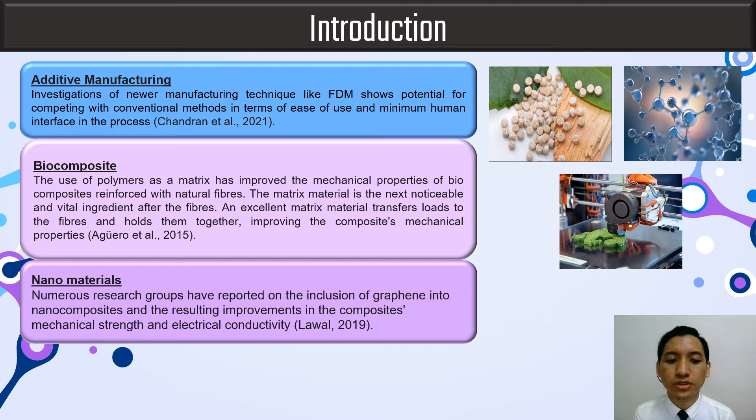Lastly, Lawal found that numerous research groups have reported on the inclusion of graphene into nanocomposites and the resulting improvements in the composite's mechanical strength and electrical conductivity.

For the problem statement, Farah et al. 2016 reported that PLA is eco-friendly, biocompatible, has good thermal processability, and is low cost. However, it has brittle behavior and degradation over a period of time, says Cao 2020. Thus, to overcome this limitation, this research aims to increase the potential of PLA. It has been discovered from previous studies.

Hybridization involves a combination of fillers and natural fibers that results in increased mechanical properties of the composite, said Khan 2005. Young's modulus and impermeability of the PLA matrix were enhanced by its blending with graphene oxide and graphene nanosheets, said Pinto et al. 2013.

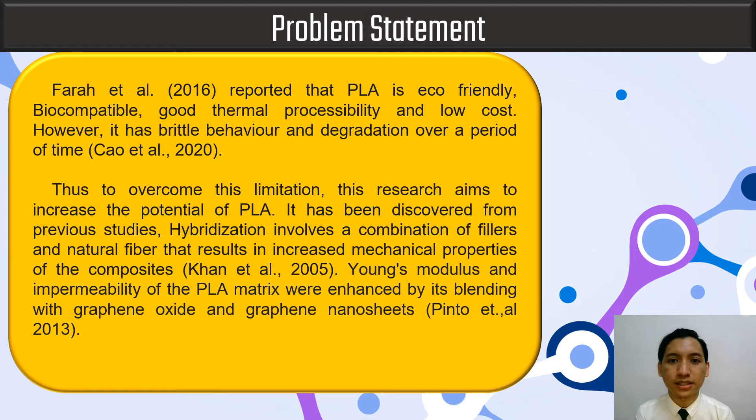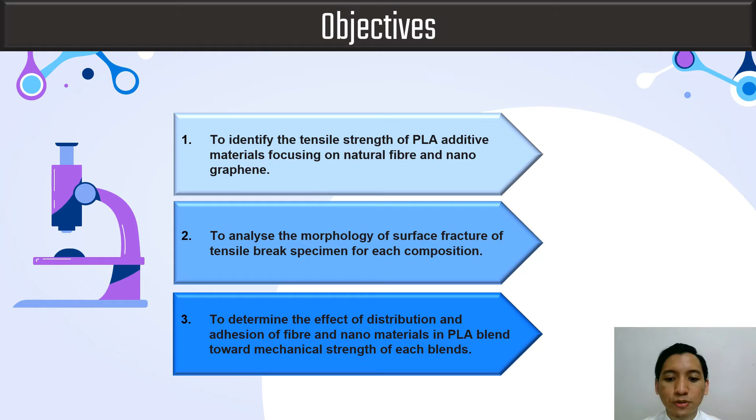This research consists of three objectives: first, to identify the tensile strength of PLA additive materials, focusing on natural fiber and nanographene. Second, to analyze the morphology of the fracture surface of the tensile break specimen for each composition. Third, to determine the effect of distribution and adhesion of fiber and nanomaterials in the PLA blend towards the mechanical strength of each blend.

This part shows the scope of the project, where we want to carry out the blending process of polylactic acid separately with fiber cockpit and graphene nanomaterials at specified compositions, analyze the mechanical property of each blend composition through tensile strength using the Shimadzu AGS-X, observe the fracture surface morphology of the tensile break specimen for each composition, and lastly, analyze the interaction and the effect of distribution between nanomaterial with PLA and biocomposite through SEM analysis.

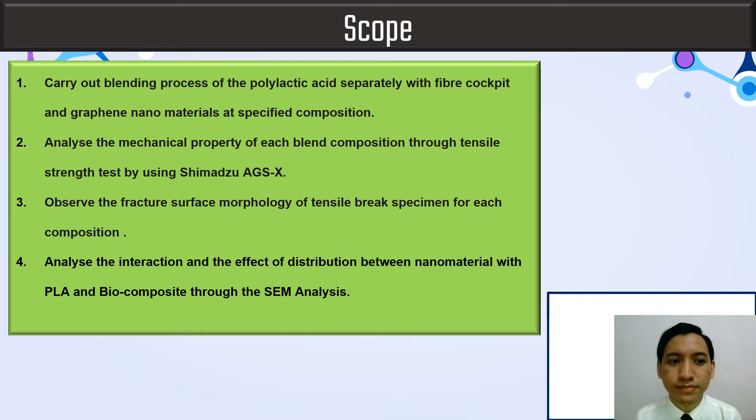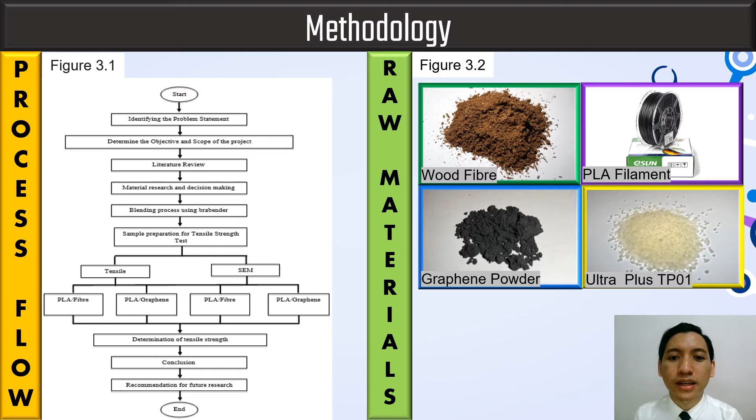Next is 3.1, which is sample preparation for tensile strength and morphology analysis. Table 3.1.1 shows the formulation of PLA fiber, consisting of 5 formulations A, B, C, D, and E and the amount of fiber content. Table 3.1.2 shows the formulation of PLA graphene, consisting of 3 formulations A, B, and C and the amount of graphene and compatibilizer agent TP01 content.

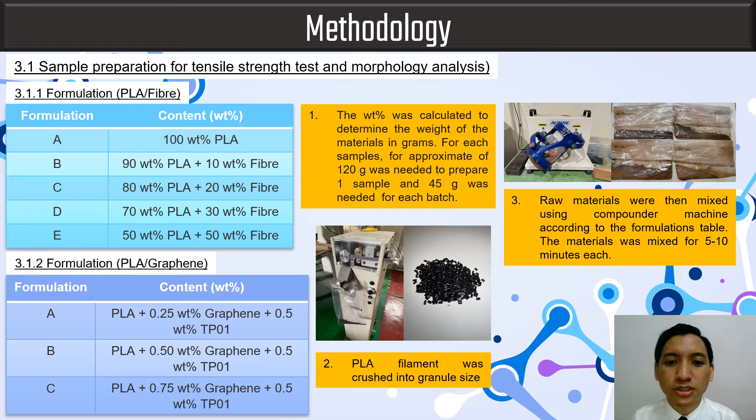The process started with calculating the weight percent of each material and determining the amount needed for each sample. Next, the PLA filament was crushed into granule size. Third, the raw materials were mixed by the compounder machine. The fourth step is the blending process using the Brabender machine according to the parameters table below.

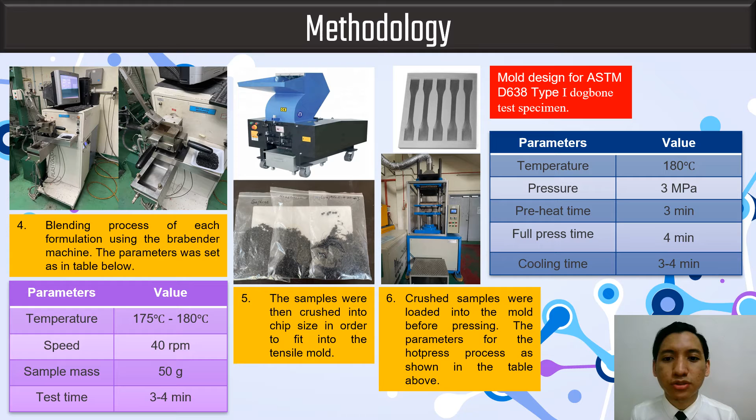Then the blend samples were crushed to be fed into the tensile mold. Then the samples go through the hot press machine according to the parameters table shown above. Next, the tensile testing was conducted using the Shimadzu AGS-X machine.

For 3.2, which is sample preparation for SEM analysis, the fracture part of the tensile samples was then coated using a sputter coat device. Lastly, the fracture surface images were captured using the Zeiss Evo VP SEM at magnifications of 200, 500 and 2000.

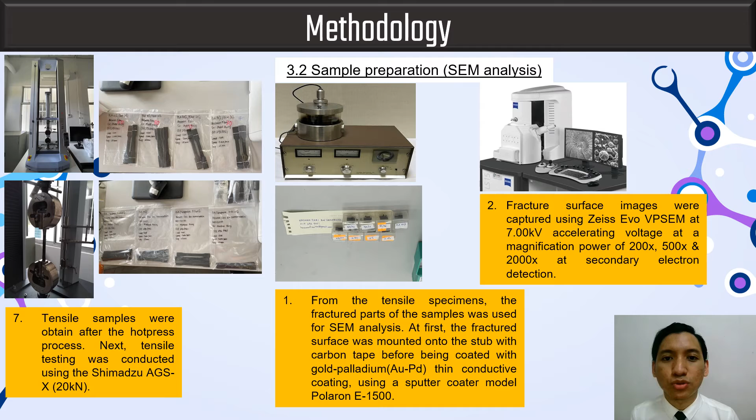So for the results and discussion, table 1 shows the max force and max stress of the PLA fiber blend from the tensile strength test. Addition of fiber up to 50% into the PLA blend reduced the mechanical strength of the blend, except for 20% of fiber.

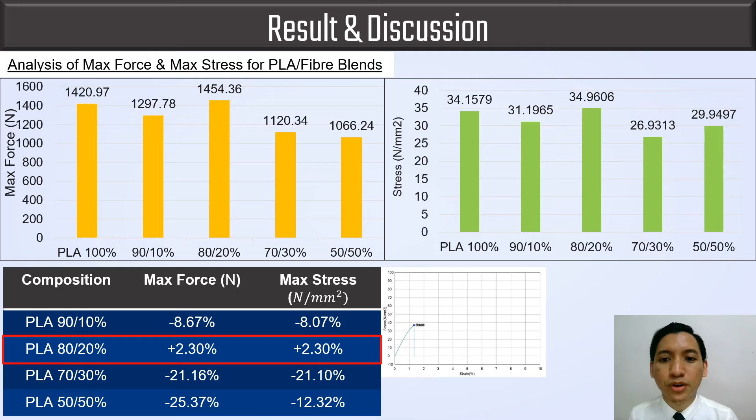For the 80-20% PLA blend, it revealed a small increase of about 2.30% in tensile strength. However, a further increase to 30% and 50% of fiber in the blend shows a large significant decrease in tensile strength, about 21.16% and 25.37% respectively.

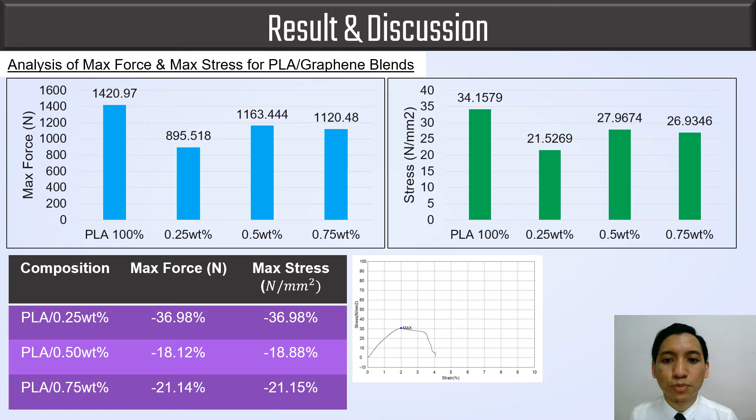In the case of the PLA graphene blend, Table 2 shows a significant reduction of tensile strength of the blend nanocomposite. The addition of 0.25% graphene in the blend results in a decrease in tensile strength of up to 36.98%. However, a further increase of graphene to 0.5% reduces the tensile strength by 18.12%, which is half of the value for 0.25% graphene in the PLA blend. But a further increase to 0.75% graphene in the blend reveals a small decrease in strength of about 3% compared to the 0.5% graphene blend.

Okay, this part shows the SEM photos of the fracture surface of PLA blends with various compositions of natural fiber. From the photos, it reveals that the fibers are not in loose form but in bundle form, embedded in the PLA matrix. The photo also shows bundles of fiber protruding from the matrix in the 90-10% and 70-30% blends, and we can see the track of fiber bundles as shown in the 80-20% blend.

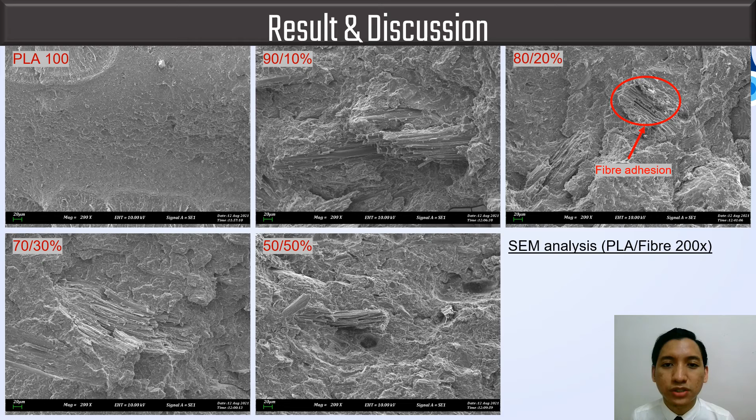The SEM photos also reveal the difference in size of the fiber bundles. We can clearly see the 70-30% blend has the largest fiber bundles compared to the other compositions. The 80-20% and 50-50% blends have nearly the same bundle size. The 50-50% blend shows the fibers were not well distributed in the PLA matrix, which forms a void at the surface when stress is applied.

Next, the SEM photos of the PLA blend with various amounts of graphene with the addition of Ultra Plus TP01, which acts as a compatibilizer. The compatibilizer has a fixed amount of 0.5 weight% for each composition, as shown in the formula table earlier. We can see the 0.25 weight% graphene blend shows the dispersion of graphene coated with the compatibilizer throughout the smooth surface of the PLA matrix.

However, in the case of the 0.5 and 0.75% graphene blends, the distribution of graphene forms irregular shaped granules throughout the matrix. On top of that, the PLA blend surface becomes rough due to the filling effect of this granule-shaped graphene in the blends. The void and granule-shaped graphene indicate that there is no interaction between PLA and graphene for the 0.5 and 0.75% blends.

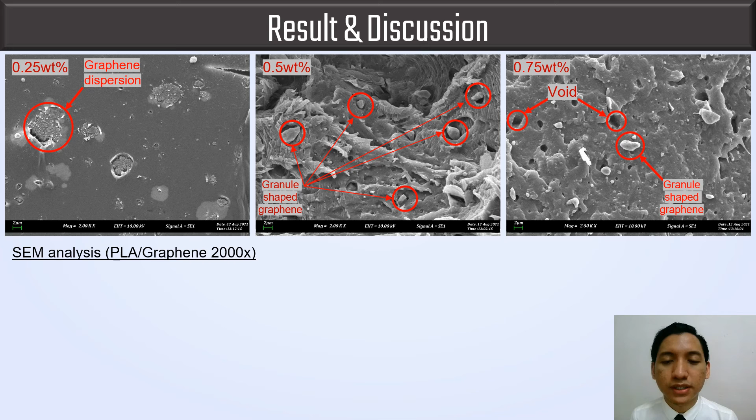Lastly, in conclusion, objective 1, which is to analyze the tensile strength of PLA with additive materials such as natural fiber and nanographene, was successfully carried out. From the result data of the two compositions, the PLA fiber composition was shown to have the most promising tensile strength. For objective 2, which is to identify the fracture surface morphology of tensile break specimens for each composition, SEM of the tensile fracture surface of PLA fiber indicates poor adhesion of the filler to the matrix. On the contrary, the incorporation of TP01 improved the interfacial interaction and adhesion between PLA and graphene. However, the dispersion of fiber in 70-30% shows that the fibers form bundles in some areas, which results in a drop in strength.

Lastly, objective 3, which is to study the effect of distribution and adhesion of fiber and nanomaterials in the PLA blend on the mechanical strength of each blend, was successful. Hence, the SEM analysis shows that there was an interaction between PLA and graphene, but there was not enough compatibilizer agent to disperse the graphene. Thus, the graphene agglomerates, which affects the strength.

And last, the recommendations: adding a few analytical methods such as TGA, AFM, and TEM to support the study. A study determining the ideal type of natural fiber and nanomaterials for improving the effectiveness of reinforcement of PLA. A preliminary study on the process parameters is required in order to achieve optimum parameters when producing the samples. A particle size analyzer is required to determine the size of each reinforcement material, which will result in a better strength result. Analysis of the combination of PLA fiber and nanomaterials to further enhance the mechanical strength of the blend.